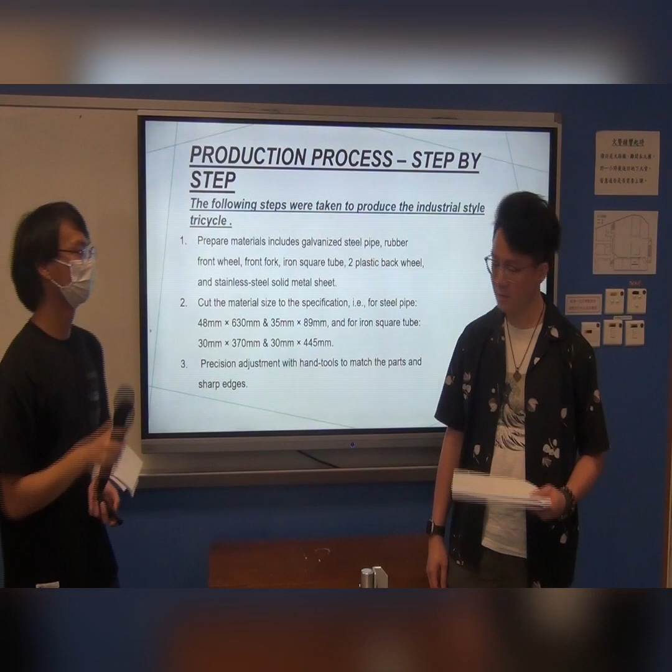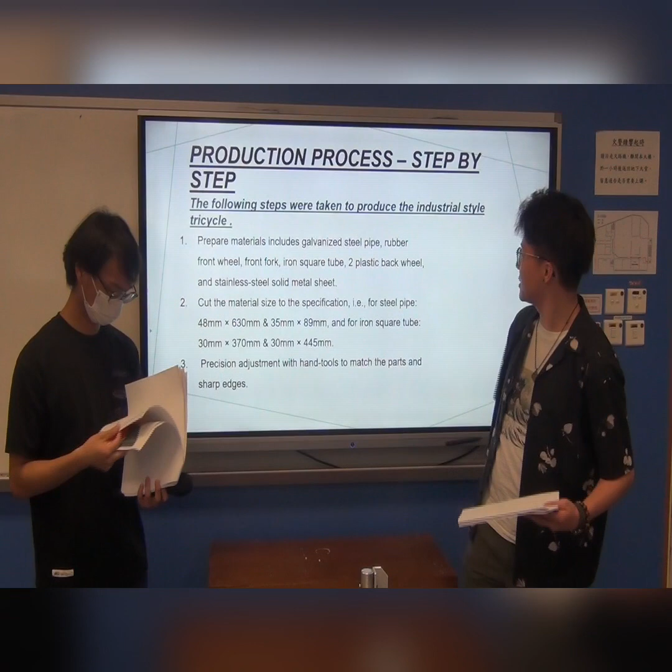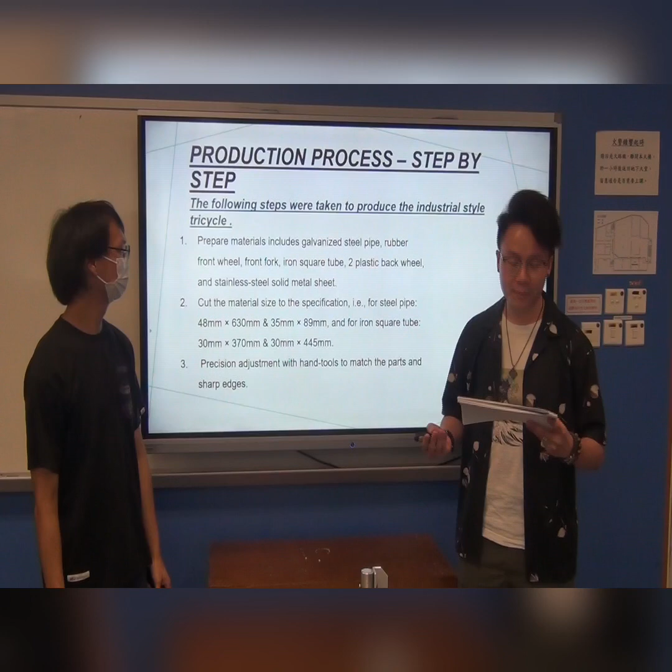So I'm going to talk about the production processes step by step. The following steps were taken to produce the industrial style tricycle. First, we prepare the materials, including galvanized steel pipes, rubber front wheels, front fork, iron square tubes, 2 plastic back wheels, and stainless steel solid metal sheets.

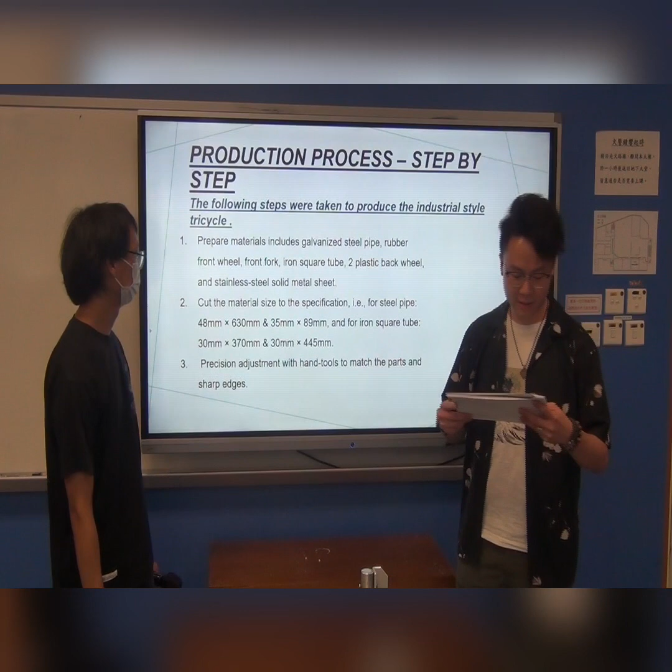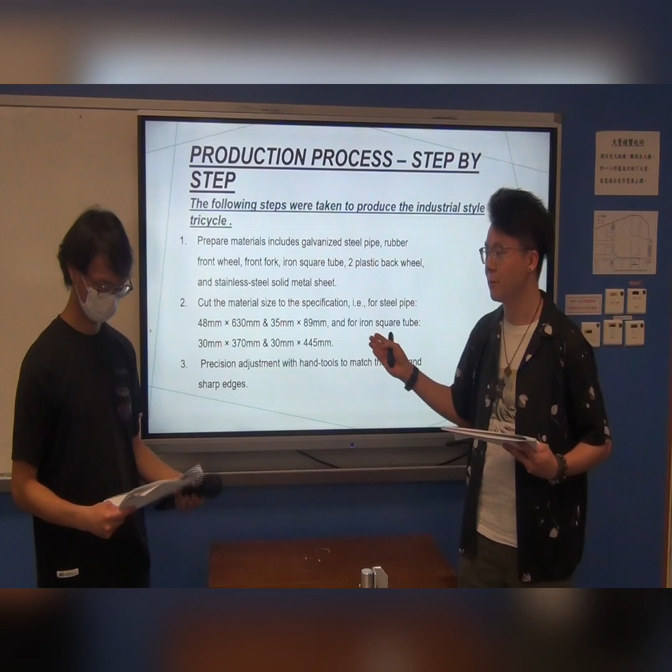Then we cut the material size to the specifications, for example, the steel pipes to 48 millimeters by 630 millimeters, and also 35 millimeters by 89 millimeters. For the iron square tube, the specification would be 30 millimeters by 370 millimeters and 30 millimeters by 445 millimeters. Precision adjustment with hand tools to match the parts and sharp edges.

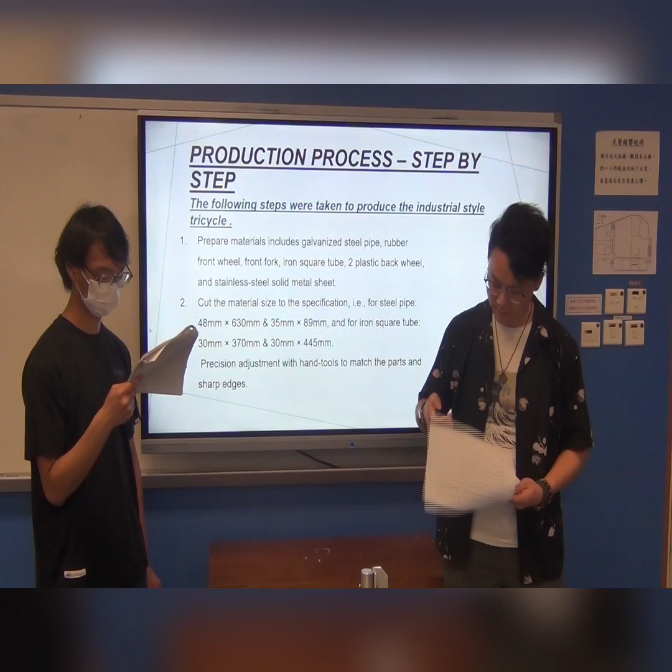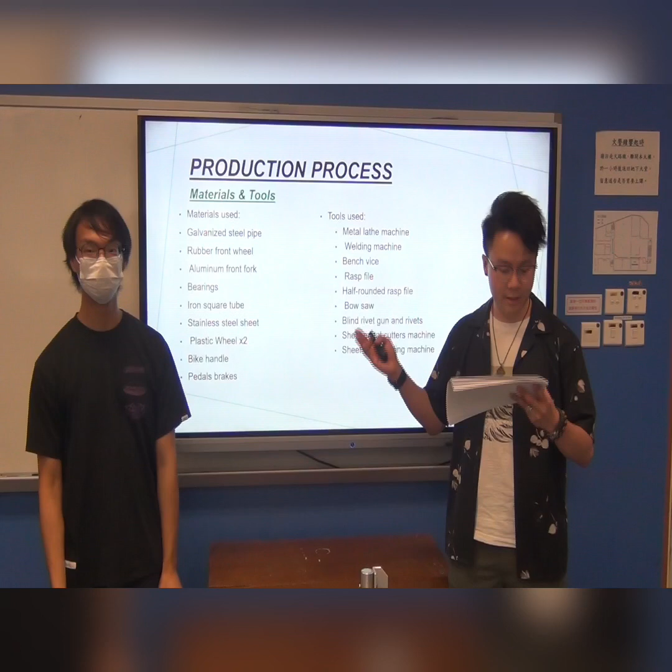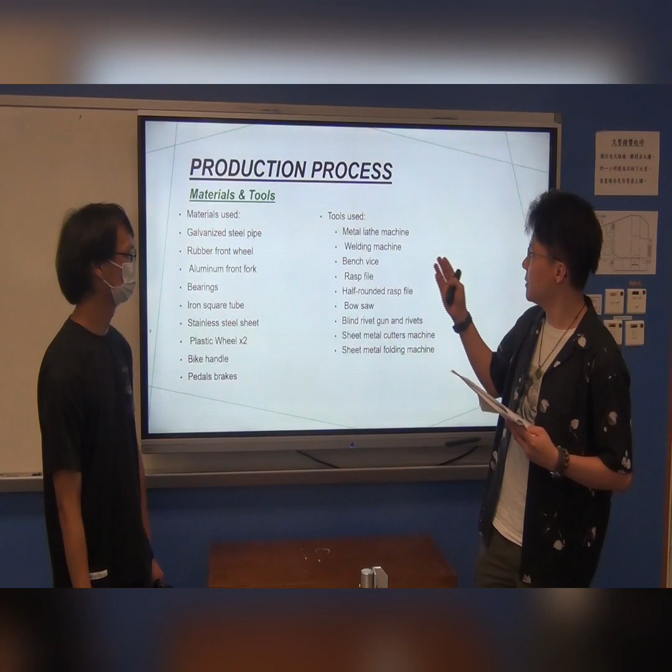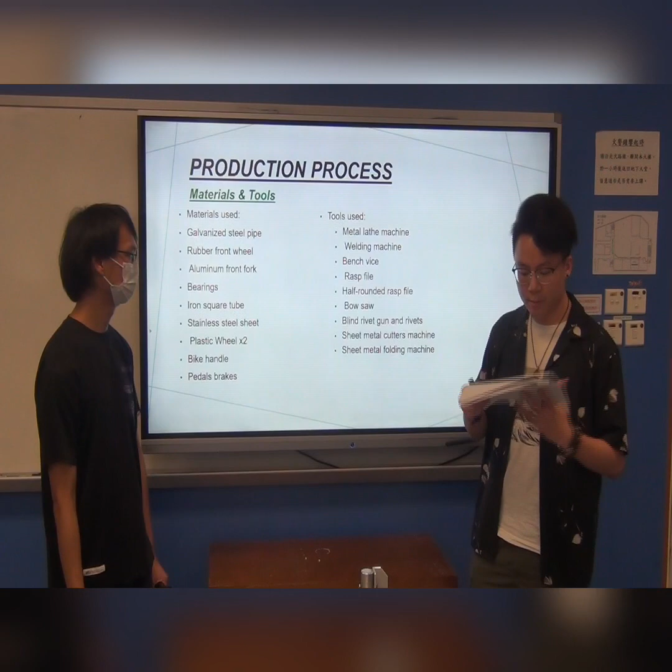So here we have a list of materials and tools. We'll just read it out. The materials we use are galvanized steel pipes, rubber front wheels, aluminum front fork, bearings, iron square tubes, stainless steel sheets, plastic wheels, bike handles, and pedal brakes. And the tools we use are metal lathe machines, welding machines, bench vise, rasp file, half round rasp file, bow saw, blind rivet guns and rivets, sheet metal cutters, cutting machines, and sheet metal folding machines.

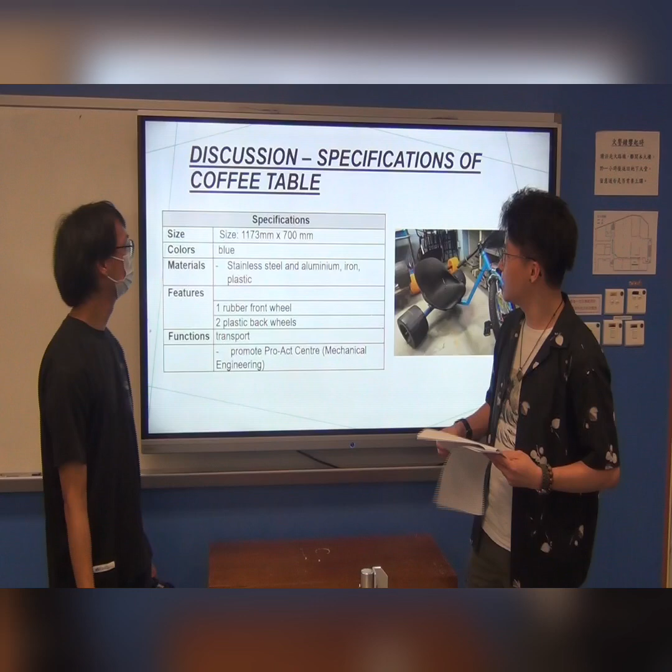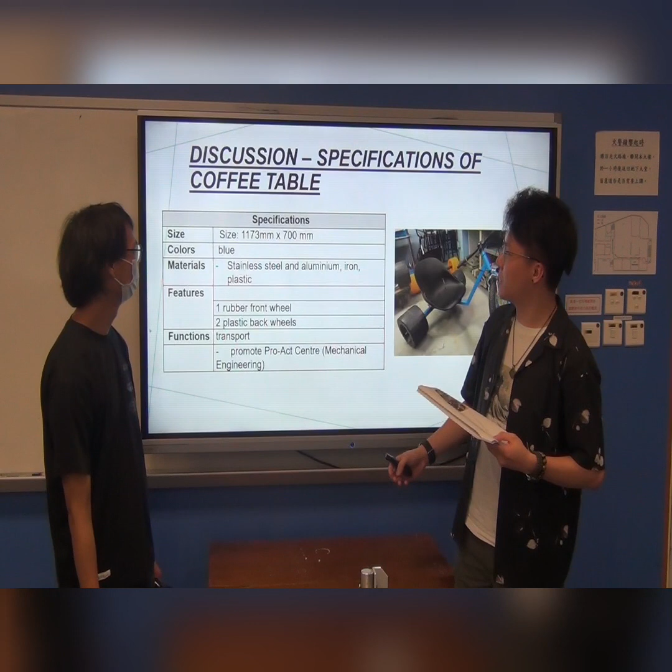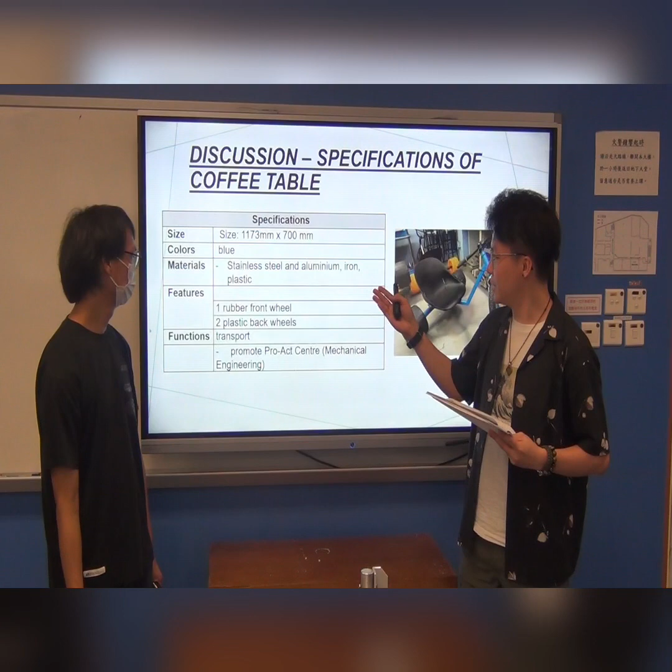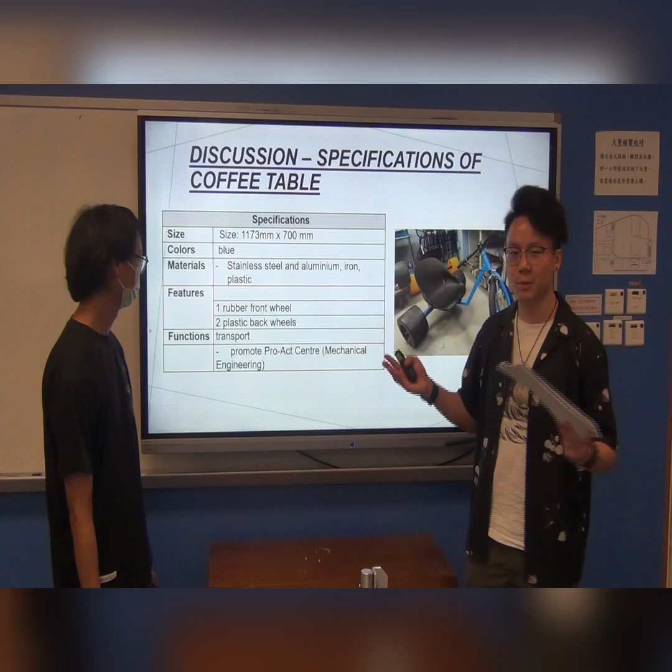So these are the specifications of the bike. The size is 1173 millimeters by 700 millimeters. The color is blue. It was made from stainless steel, aluminum, iron, and plastic. As a feature, it has one rubber front wheel and two plastic back wheels to let it drift. Its functionality is to transport in a fun way and also promote our Pro-Act Centre, the Mechanical Engineering Center.

So, challenges encountered and solutions. Problem 1: due to the difference in melting points of aluminum, which is 660 degrees Celsius, and cast iron, 1204 degrees Celsius, it is easy to melt the aluminum during the welding process. So the solution is we make sure the weld pool contacts the aluminum for the least amount of time to avoid melting the front fork. Although this might lower the structural integrity of the part, we simply welded more beads to the front fork to fix the issue.

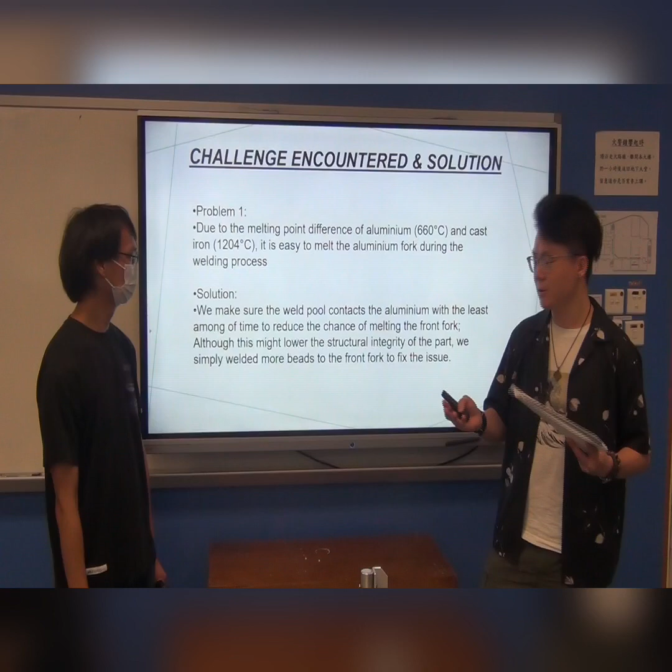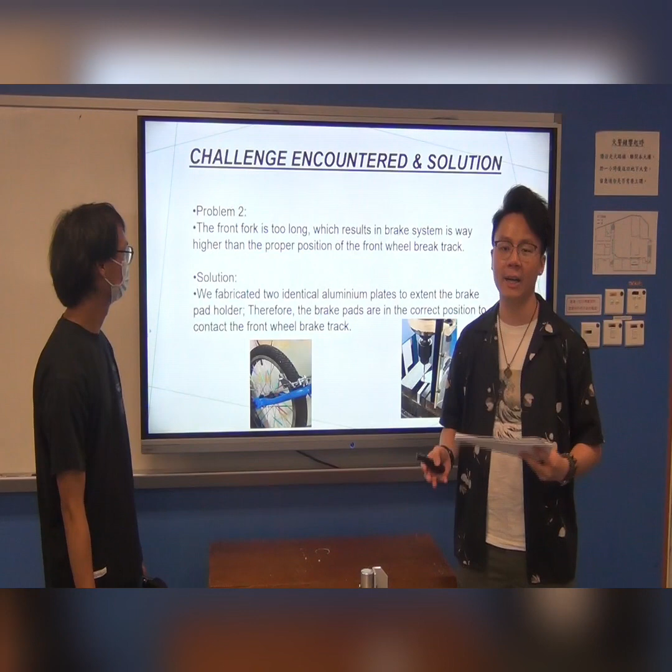Problem 2: the front fork is too long, which results in the brake system being way higher than the proper position of the front wheel brake track. So the solution is we fabricated two identical aluminum plates to extend the brake pad holder. Therefore, the brake pads are in the correct position to contact the front wheel brake track.

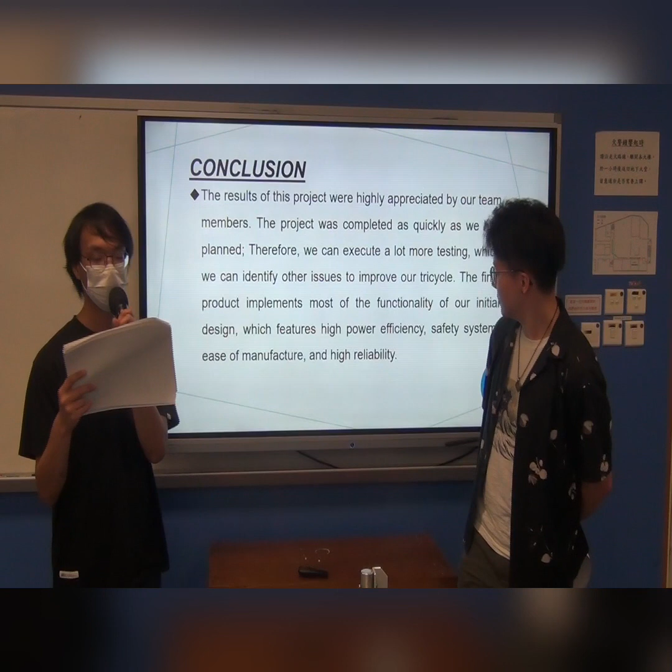Thanks, Kowloon. The conclusion: the results of this project were appreciated by our team members. The project was completed as quickly as we had intended. Therefore, we could execute a lot more testing, with which we can identify other issues to improve our tricycle. The final product implements most of the functionality of our intended design, which features higher power efficiency, a safety system, ease of manufacturing, and higher reliability. This is the end of our project.